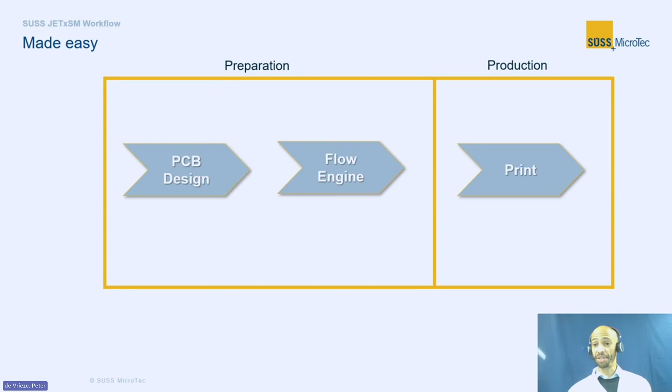First, I'll start with the first step, which is the PCB design, and which actions are needed to make sure you can actually print your board. So the first step would be to go and look at the CAD drawing that you have. When you have that CAD drawing, you need to do some design rule checks.

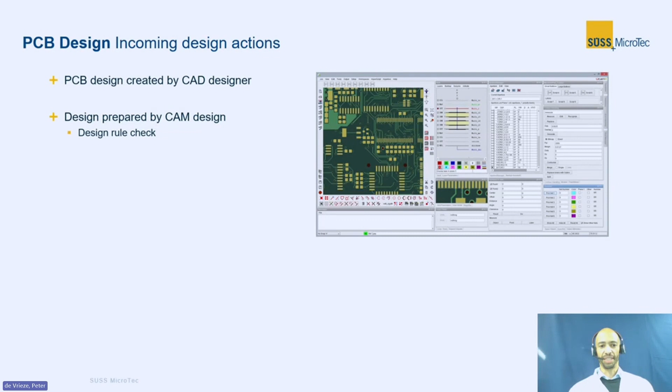These checks are, first of all, to make sure that you have the minimum clearance. And if you don't have that, you have to make sure you move your tracks, or partially move the tracks, so that you can actually print the solder mask on your boards.

In addition to that, you need to define the coordinate system. This is where you place the origin of your board in the left bottom corner of the PCB, and also keep your board in portrait mode. From there, you need to define and check the fiducials on your boards, because these will come in handy later on in the process.

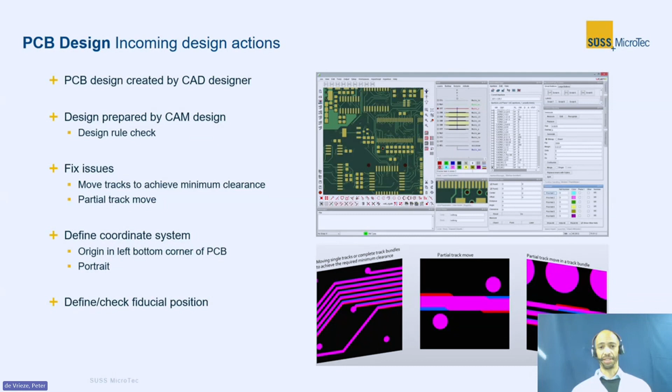Once you've done that, you can take your design into the flow engine. The flow engine is the next step of the process. It's a piece of software which we deliver along with the tool, and allows you to generate printing data out of your designs.

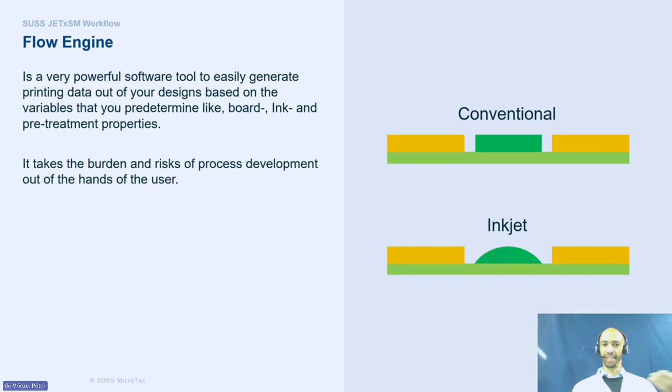It uses parameters which you have to add, like the board properties, the ink properties, the pretreatment, and together with those properties it creates a work package of data that allows your printer to deposit the right material at the right places on your board. In essence, what it does is take the process development that we've done and adds it into this software, so that as a user you do not need to develop this inkjet process for solder mask yourself. It's already in the tool, it's in the software.

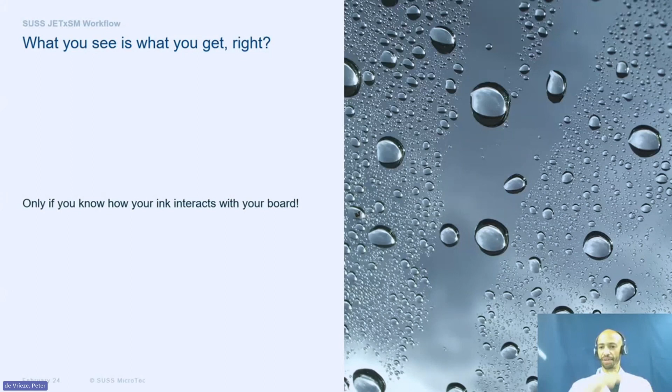That means what you see on your design is what you get on your board. And that only works if you know how the ink reacts with your board—how the material flows out, how it stacks on top of itself, and how you can create printing recipes. There are a few things that need to be combined, and this is all done with the flow engine.

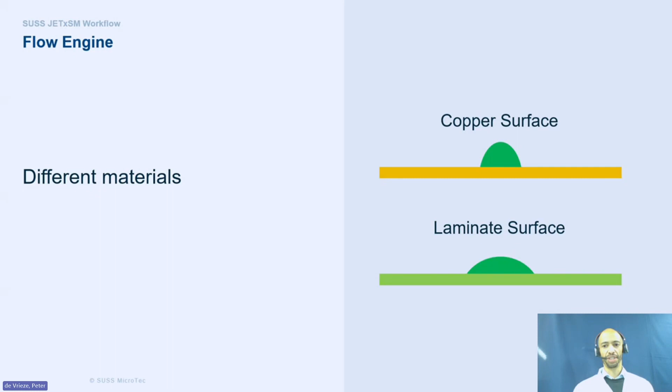So which parameters does it work with? First of all, the material. On which type of material are you printing—copper or laminate? Printing on one material or another influences how the material flows out, so it's important to know which material you're printing on.

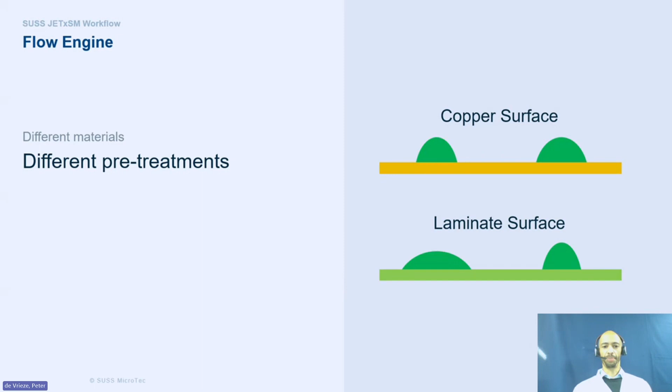Second is the pretreatment. There are different pretreatments out there, and each pretreatment has a certain reaction with the material that you print on top of your substrate or board. So it's important to also add in that factor.

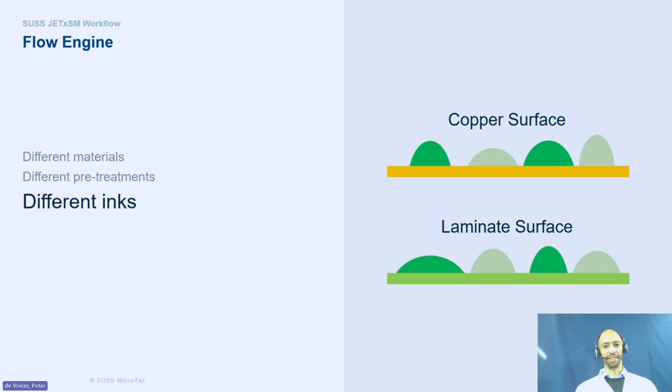The third is the ink. There are different ink manufacturers out there, and today we're lucky to have a few of those ink suppliers participating in this webinar. They'll tell you that their material has certain characteristics and its own way of printing.

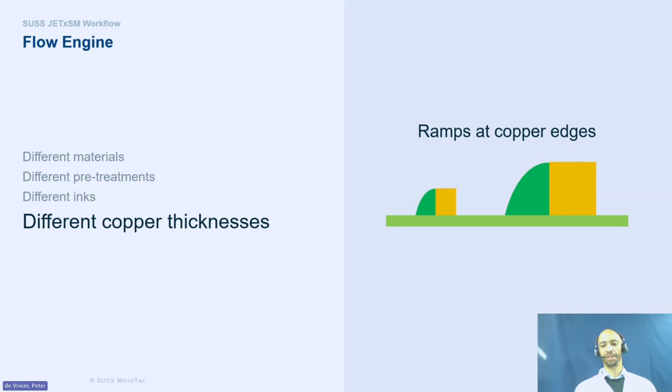Once you know all this, it's important to know the thickness of the copper on your boards, because that defines how many layers you need to print on top of each other to build your structures. If you look at the image, you'll see different sizes of copper, meaning that when you build ramps next to that copper, you need to make sure you build enough ramps.

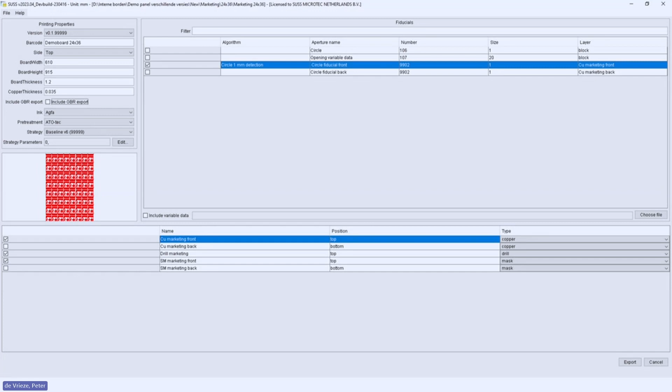Once you know all these things, you can take it into the flow engine. You'll see there's an overview where you can place certain information. Once you have your design, you can upload it into the flow engine, and this design can be in different formats—UCAMX, ODB++, DPF, or Gerber files. Once done, the flow engine gives you a small image of what you'll be working on.

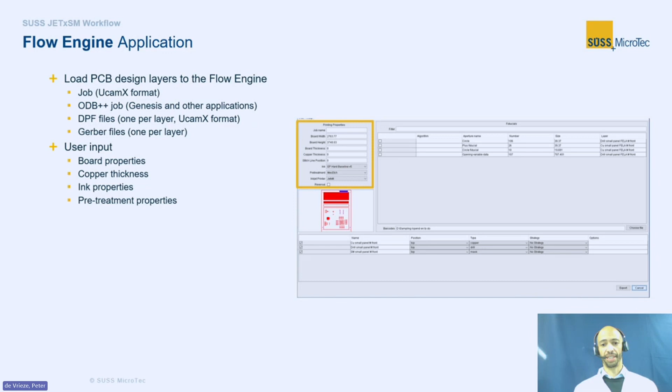You'll see there are a few parameters to fill in, like board properties, copper thickness, ink properties, and pretreatment—the factors I just mentioned. It will take those into account. So if you're using, for instance, an ATO-tec or a Mac Edge pretreatment, you fill that into the flow engine, and it will compensate for the outflow of the ink based on that pretreatment.

Once you've filled in these properties, you can select the fiducials you're using and tell the tool how it should detect them. Then finally you select your layers—which one is the copper, which is the solder mask, and which is the drill layer—so the software can take that into account as well.

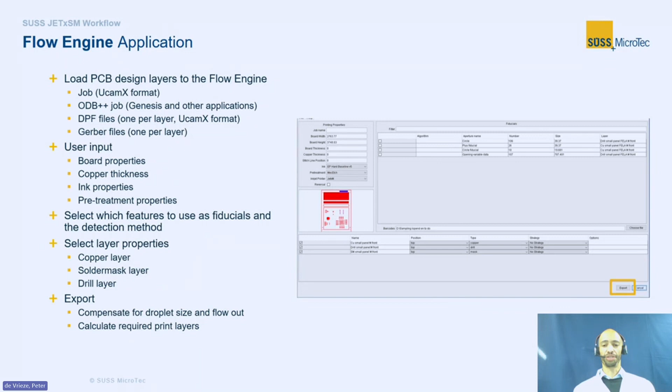Once you've done all this, you click the export button, and the software will create a work package for the printer. This work package creates data where we can compensate for the drop size and the flow-out of the material, and also calculate the amount of layers we need to print.

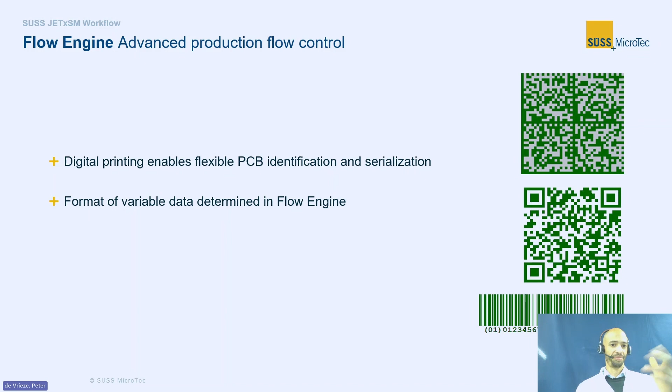Because inkjet is a digital technology, we have a lot of flexibility to add additional information to that work package, like identification or serialization. All of this can also be added through the flow engine, which helps with traceability of the parts later in the process.

Once we have this work package, we can export it and share it to either a network drive or directly to a printer where it can be retrieved. On the flow engine, you can work with one flow engine for multiple printers, meaning you can create these work packages and send them to different printers on your work floor.

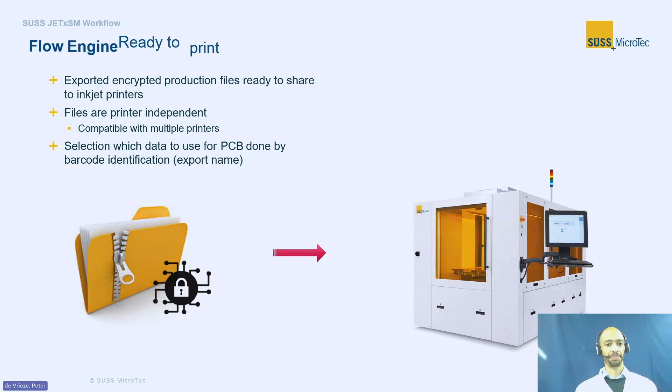Once you have those work packages stored, you can retrieve them on your printer using a barcode scanner or through the HMI on the printer itself. So we've prepared our work package, and once we have that, we can retrieve it and start a print. Today I will print on a JETxSM 18.

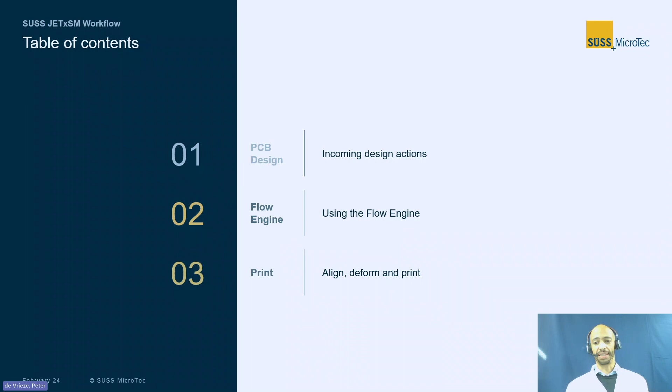And the JETxSM18 is actually the printer that is standing next to me. The JETxSM18 is a solder mask printer that can accommodate boards up to a width of 18 inch.

And it uses the Fujifilm Dimatix Samba printhead, which is a printhead that has over 2,000 nozzles, with each nozzle a droplet size of 2 picoliters. This particular machine has 6 of these printheads all in line, and has a UV bar before and after the array of printheads.

The reason we have the UV lights before and after is because when we are printing, we can instantly also cure the ink when it hits the substrate and pin it down so that we can adjust the flow out of the material. We have the light on both sides so that we can also print in 2 directions.

As mentioned, this tool has 6 printheads, and in order to print a board which is 18 inch, we need the amount of printheads that we have in this machine to cover half of the board size. That means we print in 2 different passes, so we have to cover half and half.

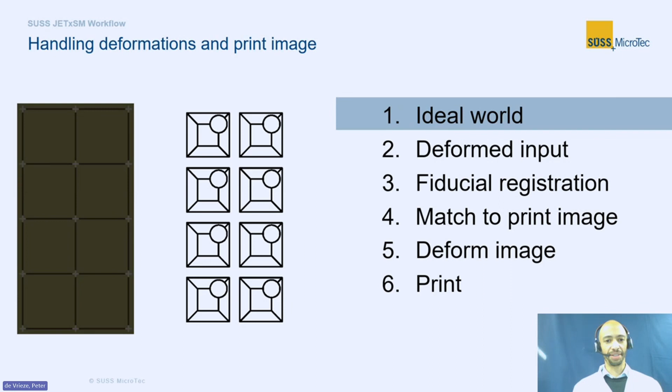Now, before we start the print, I would just slightly want to explain a little bit about the process of the print itself. First of all, before it will start printing, it will recognize the fiducials on the board. When it does that, we actually detect where the board is on our table, and if the board is aligned or maybe even deformed. So in an ideal world, you would have a board which is perfectly flat, perfectly straight, and you have your design that you want to print right on top of that.

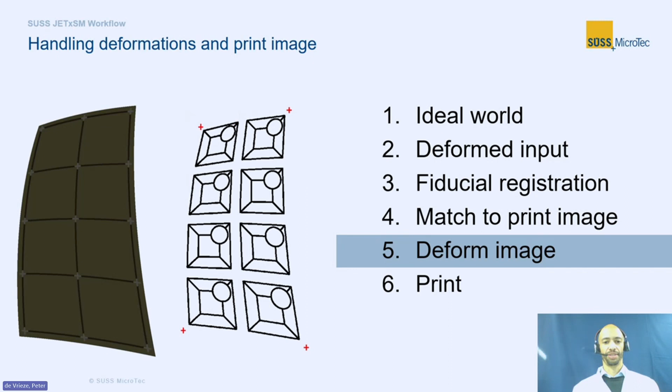However, if a board is not perfectly straight, and if it's slightly deformed, then you might have an issue when you start printing your design. So what we do before we start printing is an alignment, and we scan the fiducials on the board. And if we then detect that there is an offset, we will match the image that we want to print to what our board actually looks like. So prior to printing, we will deform that image, making it fit to the board, and then we do the print.

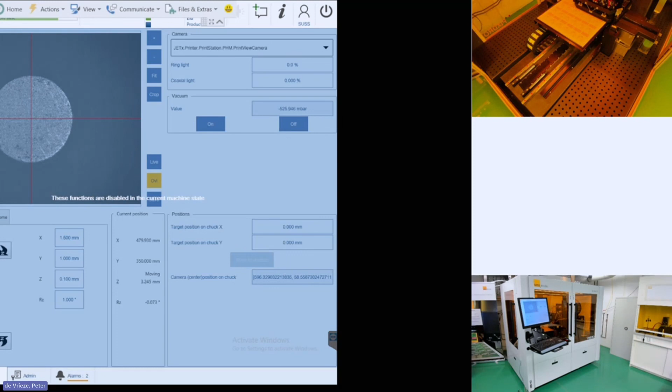So that's what we also will show today. So in order to start our print, you retrieve the tool, the part, you press start, and then from there it will start doing the alignment. So as you can see here on the screen, it's searching for the fiducials. It's scanning every corner, and once it's done that, it will calculate and see how the board has been deformed, how it is aligned, and after that, it will generate a new image that is fitting to the board, and then it will start to print.

So as you can see now, it's starting. You see the lights flashing. You will not see a lot, especially not on the first layers. We print in several layers. To the trained eye, you can already see that there have been some changes to the board. And what we do now, we start off by printing the dams and the ramps, finer features of the board.

And we do that in different steps. Depending on the thickness of the copper, depending on the pretreatment and the ink, the printer will determine how many ramps are needed. After you have printed the ramps, we will print the fill layers. So right now for this recipe, we will print 2 ramps and dams and 2 fill layers. So now it's printing the fill layers, as you can see.

And as you can see, this is a very, very fast process. So now you see all the ink has been deposited in the places where we want it to. And in this recipe, we've also added a UV bump. So we're adding an additional layer of UV to pin down those droplets. And there is a slight delay on that because we want to make sure that the ink flows out a bit so that we get a nice shiny finish.

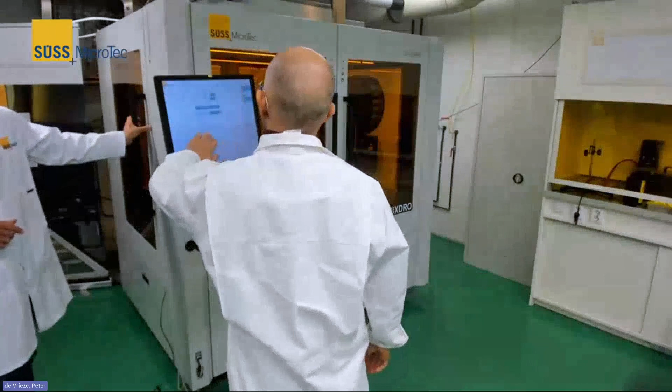So the finish of the board can be determined by changing the recipe, changing the parameters. So we see the board now is finished. So in order to retrieve the board, my colleague Monier switched off the vacuum, and I can take the board out of the printer.

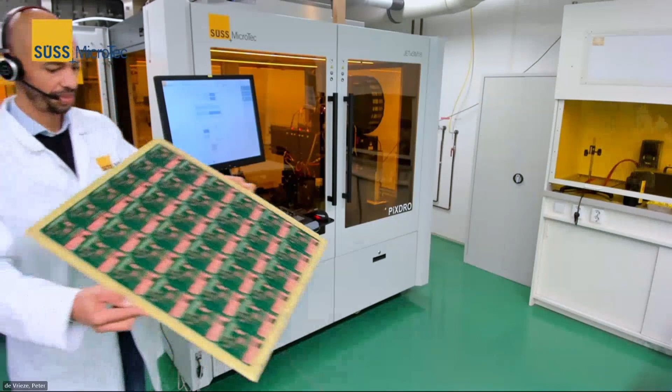So here you'll see we have our printed circuit board where we've added the solder mask onto the board. It looks very shiny. As you can see, we have deposited the material only where we needed it, and we've kept the areas that we want to keep free of solder mask exposed. That really keeps the process very short, and it requires a lot less steps than a conventional way of adding solder mask.

It looks very shiny. I can take this board out of the printer, and the ink is already cured. To give it a final cure, the next step would be to place it into an oven, but that would be a next step. So that is the printing of the solder mask with inkjet. I hope this was very informative for you guys.

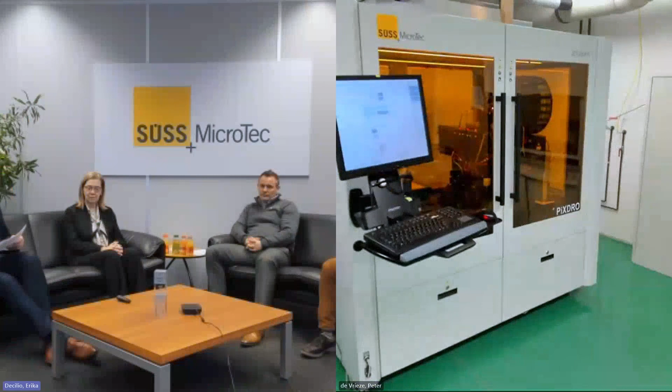Take it away. Really impressive, nice to see. It feels like I'm covering the World Cup of solder mask inkjet printing with all the cameras in a machine, in the laboratory, in a conference room.

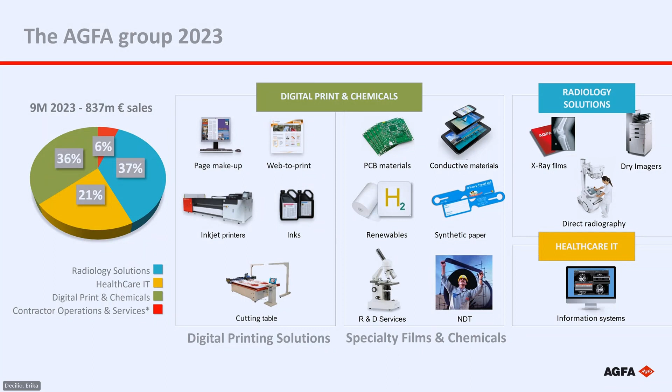Now I want to go more into inkjet printing. So we have more than 20 years expertise in inkjet, starting from our graphics division - inkjet equipment, inks, and everything for sign and display. From that experience, about 10 years ago, we decided to develop inkjet inks for the electronic print or PCB market, functional inks.

For the ink preparation, we have our labs where all the development work is done. We have a pilot plant and we have our industrial scale facility. We have a capacity of 2 million liters of inkjet ink per year.

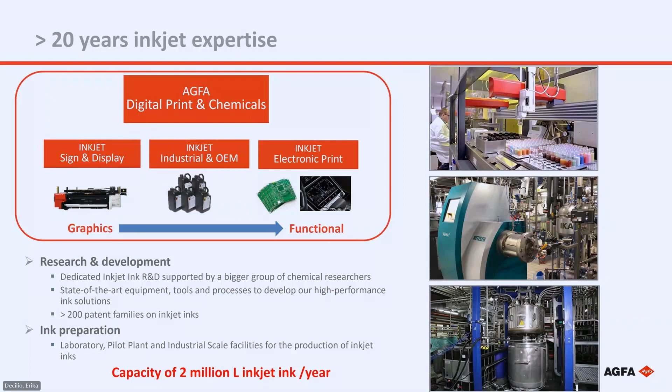Today we have the full range for PCB production. We have our Legend inks, the first products we had for PCB which really introduced inkjet into the PCB market. We have white, yellow and black Legend ink for rigid boards, and a flexible white Legend ink. Then we have our SMG02, our DiPaMat solder mask, which we'll talk more about in the next slides. And we also have our etch resist. We have our first generation etch resist ER01, but we have a new one in the last phase of development that will be commercial very soon.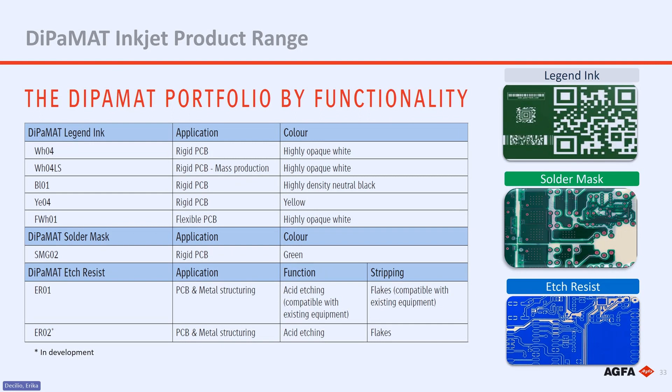Our inkjet solder mask, DiPaMAT SMG02, is commercially available since quite some time and already used by several producers in the market. It offers excellent edge definition. You can use it with a wide choice of print heads, due to the viscosity of the ink. It can work on Konica Minolta 1024i M and S heads, the Konica Minolta 1800i head, as well as the Fuji Samba head. It's quite a flexible ink, so it can be used for both rigid and flex applications, and it's validated by the printer integrators.

Of course it's compliant with the industry and environmental standards. We comply with the IPC SM840 standard. We are UL 94 V0. It also complies with the more stringent requirements from the automotive industry, certainly on thermal properties, the E2000. It complies with REACH, it doesn't contain any SVHCs, substances of high concern. It's RoHS and VOC compliant.

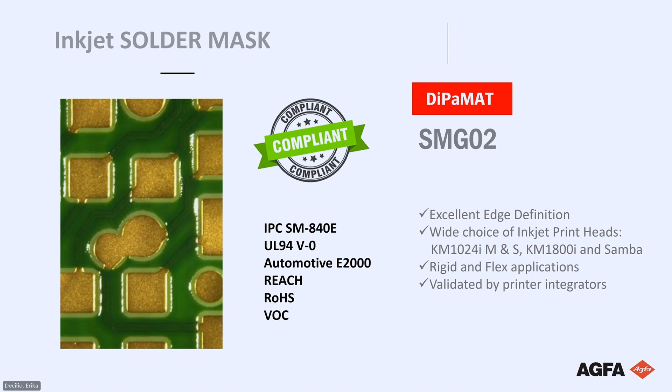The next slide gives a few details on the different standards we have to comply with. It's not everything, I listed the important ones, but everything is available and listed in our technical data sheet, which can be downloaded from our website.

To go through the important ones, it's UL V0. It complies with the solderability standard, resistance to lead-free solder, the two IPC standards in compliance with that. Hydrolytic stability and aging, thermal shock and storage, the -65 up to 125 degrees centigrade for 100 cycles, is the IPC standard, but we can do the more stringent standards from the automotive industry. You can also put it under thermal storage for 2000 hours at 150 degrees without giving any cracks or adhesion issues.

We tested all the surface finishes. It adheres very well, it doesn't give any cracks after tin immersion, ENIG, silver immersion, hot air leveling, OSP. It also complies with the outgassing law and with all the electrical tests. More details can be requested, we are happy to share this information with you.

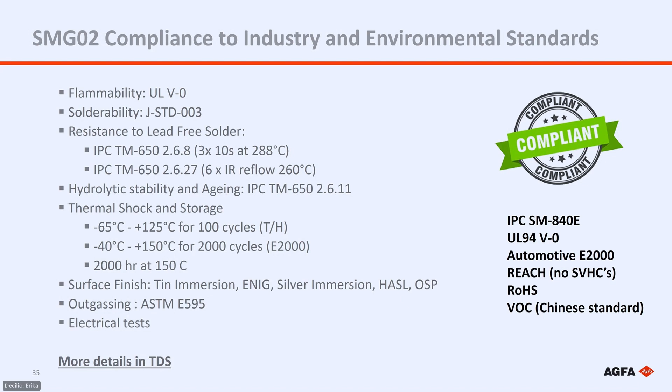Today I'd like to talk about the footprint of inkjet solder mask compared to traditional solder mask. As you can see from the flows, inkjet first and then conventional solder mask, inkjet is a lot shorter and has much fewer steps. Because of that, the physical footprint of inkjet solder mask is much smaller. You don't have the full coating, you don't have the pre-drying. In case you were still using film, you don't have the film plotting, no exposure, no developing.

But even more important is the environmental footprint. You have less materials, no film consumption, no film developer or fixer, no ink waste because it's a fully additive process, and it's more selective. It's also more sustainable because it's solvent free, so less VOCs, and also less nuisance for the operators. Much less steps, so much less power consumption, much less water consumption.

In many areas around the world, legislation is getting more strict for the use of chemicals, for chemical waste, for VOCs, for water consumption. So the expansion or building of a PCB plant is getting more and more difficult. Now with inkjet solder mask, it really gives you the possibility to grow your business without growing your footprint.

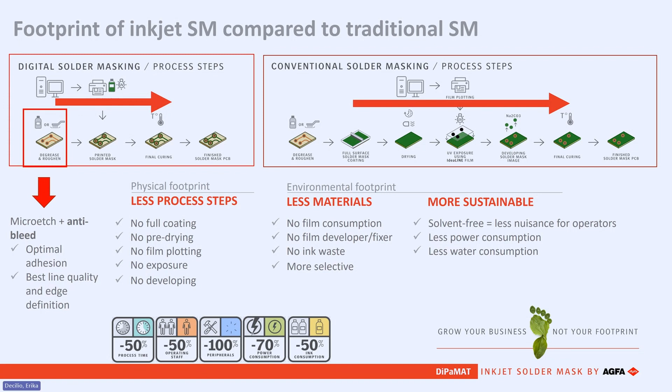Now, inkjet solder mask also has technology advantages. It's very revolutionary, it's fully additive, and you have full flexibility. As Peter already explained, you can print a QR code for serialization and traceability. It's all possible with inkjet.

It's 3D printing, so it allows you to deposit variable thickness and coverage on a board. If you need resistance against electrical voltage breakdown in a certain area, you can put a thicker layer there. If an area doesn't need solder mask, for instance for high frequency 5G applications, you simply don't put any solder mask there. In preparation for the assembly phase, you can build 3D structures, like walls for underfill. It's all possible with inkjet solder mask.

In the case of boards with high copper, with traditional solder mask you sometimes need multiple passes through the full solder mask process, 2 or even 3 times, to get good enough coverage of the shoulder of the copper track. With inkjet solder mask, it goes in one pass. You build the dams to a certain height, basically the height of the copper, in multiple passes. As you can see on the picture, shown in blue, you see the different layers clearly. So it's much faster and more efficient.

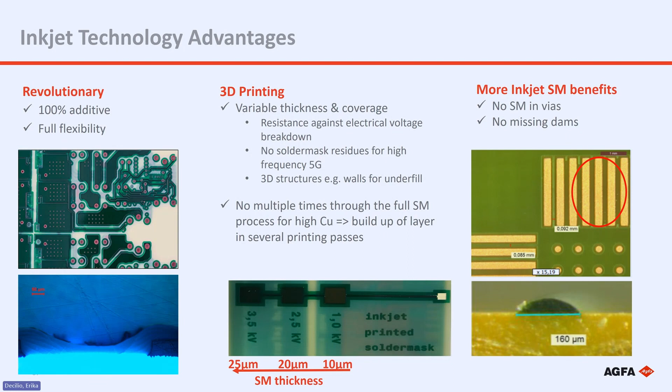So as a conclusion and summary, the breakthrough of inkjet is really happening. We see new greenfield PCB plants choosing inkjet solder mask. There are already more than 35 installations up and running worldwide, and OEMs have high interest and have started validations. Agfa can be your partner for this emerging new technology.

We have a worldwide presence, with offices in the US, in Europe, and in most countries in Asia. We have a very strong network in PCB because we've been active in the PCB industry for more than 50 years with our traditional Idealine PCB film. We have deep know-how in inkjet, also from our experience in the graphics field, and we are fully equipped to support the transformation to digital production.

We have the full PCB process in our labs. We can pre-treat boards, we can finish boards with immersion tin, and we can print, we have inkjet printers. So we can fully support you with the benchmark and evaluation, of course in collaboration with our partners, but we have everything also in our labs.

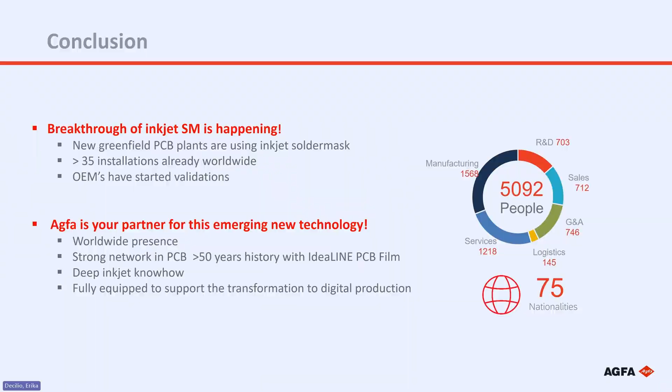Most impressive to see that all the assumptions from over the years have been converted into facts of the advantages that inkjet can deliver, facts that have been proven and tested. As we know, also your close cooperation with SUSS in developing the inks, the machines, and effectively the process. So yeah, it's specialism at its best.

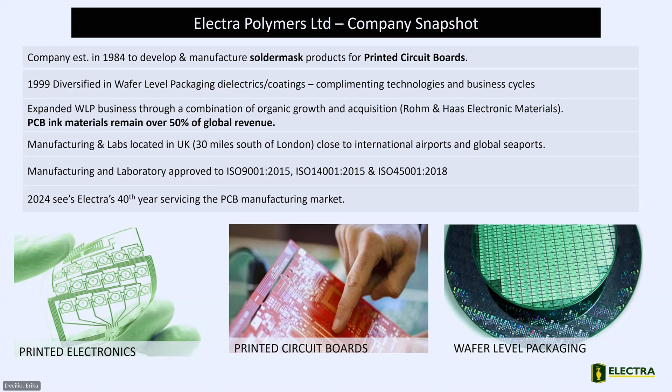Electra is already established as a technology leader in traditional solder mask, but we are also emerging as a technology leader in inkjet solder mask. We have a wealth of experience. As I've already said, we've been in service to the PCB industry for 40 years, so we have all the experience from the traditional solder mask and all the know-how of the processes before and after.

We commercialized our first inkjet solder mask more than 5 years ago, and we have been researching inkjet solder mask for more than 10 years. We've worked very closely with all pre-clean manufacturers and integrators, and also printhead manufacturers, so we are currently approved on and with the major printhead and tool manufacturers.

We have a lot of customers currently using inkjet solder mask, some of which have already made the switch to 100% inkjet solder mask, so removing their traditional process.

The technology, as we see it, inkjet, works well with our current roadmap, being digital, it's additive, and it's sustainable. But importantly, it's been earmarked for a lot of growth. We've managed to work with potential customers on volume installations in America and Asia, and I think I'm fairly safe in saying that by the end of 2024, Electra will be the largest supplier of inkjet solder mask globally.

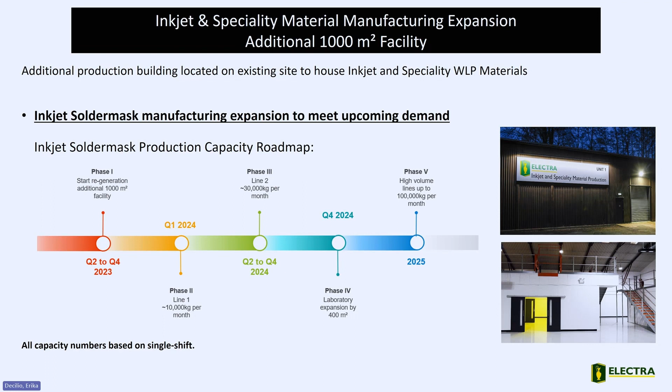So coming on to the main part of the presentation, to identify some of the internal challenges of PCB manufacturers as we see them, mostly within the solder mask sphere, but some of these can relate to other aspects also.

One big factor we've seen post-COVID is personnel. Finding new people, and more importantly, keeping new people, is becoming more problematic. There's a number of areas we see with this: some are generational, some relate to the work environment, the specialist skill set around solder mask application, and the sheer number of staffing needed for the department.

Inkjet has an important role to help negate some of these issues. Inkjet is a digital process, front-end driven, so it's more appealing to the younger generation who have grown up with technology, more used to screen-facing systems, not so much the hands-on manufacturing side.

From the environment aspect, the solder mask department can be a bit smelly, handling chemicals, solvents, masks - a different type of environment than some people are used to who haven't been in manufacturing. As we've seen from Peter's presentation, Inkjet is a clean environment. It's boxed in, with extraction and filtering, so limited smell, limited exposure to chemistry. It's a hands-off clean process that will make it more appealing to potential staff.

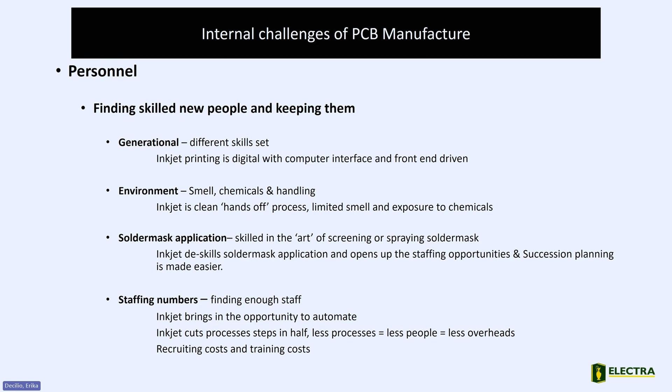Also something that is seen as a risk is defects, causing scrap and remakes, which all cost money. You have FOD - foreign object and damage - ink in holes, ink on pads, ink where you generally don't require it or want it, missing dams, missing features, or expanded dams and features.

So how does Inkjet help with this? Well, Inkjet is within an enclosed, filtered coating environment. It's pin-cured before it leaves that environment, so it's not wet or sticky. So when it comes out into the solder mask department environment, which may be unfiltered or not exactly a clean room, you won't get foreign objects sticking or placing on the solder resist. It also doesn't have to go into a tack dry oven circulating air, which with wet or sticky ink could cause an issue.

As covered previously, it's an additive digital process, so the ink is only applied where it's required. If the data is correct, the mask will be deposited where you need it - not in a hole, not on a pad.

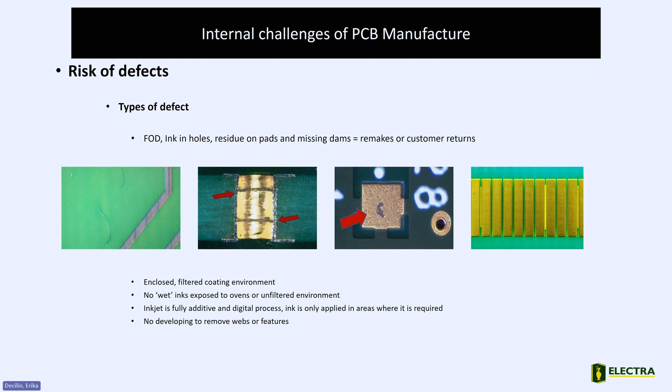Environment regulation - as we all know, these restraints are becoming tighter and tighter. As Mariano correctly pointed out, this is very important moving forward. Restrictions on water, even just in some countries on getting water in and taking water out. VOCs are becoming a bigger issue. Energy constraints, cost of energy, or even availability of energy - these are all relevant to PCB manufacturers today.

Regulation - new regulations seem to come out every day, every month, every year, changing on a regular basis. I can say that EMJ 110, Electra's Inkjet solder mask, has zero SVHCs and complies with other related regulations. I'm not saying the Inkjet solder mask won't be covered by new regulations or changes in regulations - it will be tied to that also. But the way we formulate our products means we can formulate out some of the substances which are SVHCs.

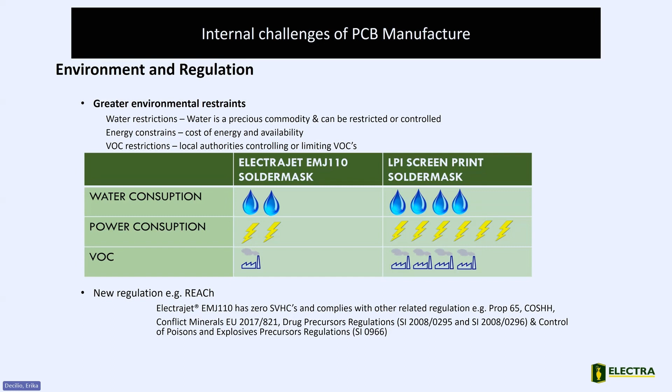So hopefully now I've sold you on Inkjet itself and the process and all the positives. How does that translate? How do you move that on to your customer, the OEM, the CEM, the final user? So here are some unique selling points and potentially some upsells that you would be able to use once you adopt the technology.

Meeting industry requirements - not necessarily an upsell or unique selling point, but meeting all of those requirements such as IPC SM840, thermal shock, storage - should be a reassurance to your customer, the end user, that the product is fit for purpose.

I've covered also that it's an additive process, so reducing defects such as ink on pads, ink in holes, missing features is now also not necessarily an issue with Inkjet.

And repeatability is an automated front-end driven process, therefore there's limited human interaction and human factor, which means you should be able to control the process better, with reduced process steps. You won't have humans interfering with the process, changing parameters or leaving things in processes for too long. Again, not necessarily something you want to communicate to your final user, but the fact that you have less process, more repeatability, less chances of error should be a selling point.

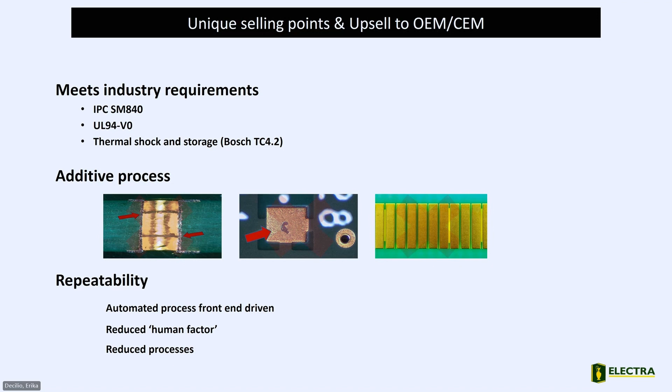Flexibility - I don't necessarily mean flexibility of the mask, but flexibility of the process. This is where Inkjet really excels with its unique selling points. You can jet more mask in one area, less mask in another area, put mask on a copper track where it's needed for reliability testing, or not put any ink, or a limited amount of ink, on the laminate. Or you can build 3D structures - walls, dams, barriers - to help with underfill or solder paste placement. These really are unique to Inkjet, and your competitors who don't have Inkjet will not be able to offer this to the OEM or the final user.

Sustainability is clear. All organizations, big, small, medium-sized companies, all need to show that they are on the sustainability path and show their green credentials. Inkjet is certainly a way that you can improve on these things.

Industry 4.0 is something that is very important. You have the possibility of automation, you have more data because it's data-driven, connectivity, traceability, which is very important. Also, you're going to have analytics and AI. All of these things can be used to continuously improve your process and can be sold to your customer as a real advantage of the process.

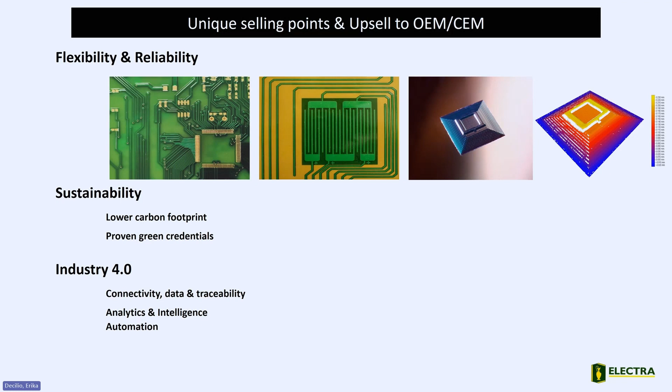So in summary, Inkjet, I think, as we've all said, is now here. It's arrived. It's not coming - it's here. 2023 was a big year for Inkjet solder mask, there were a number of placements. 2024, I think, will be an even bigger year. There are multiple placements of tools this year, from small volume, medium volume, large volume. So it will be proven across the spectrum.

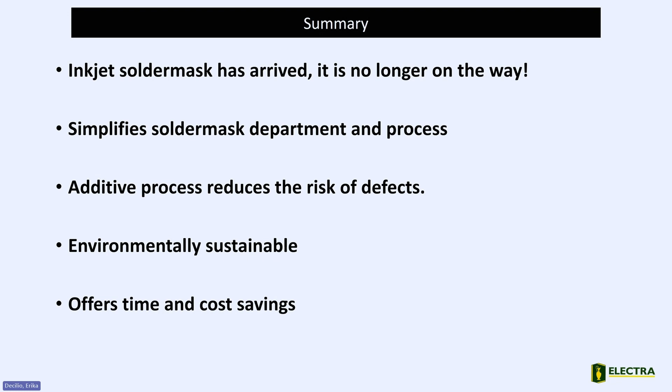Inkjet solder mask simply simplifies the process. It's a simpler process - maybe not simple, as I'm sure Luca would agree - but it helps simplify the process in regards to fewer process steps and it not being such a skill in regards to screening or spraying. It's additive, as I've explained a number of times. The risks of defects and all the things attributed to that will be a real benefit, not just to the PCB manufacturer, but also the end user. Environmental sustainability, that's obvious - Inkjet solder mask is greener. And a big part of everything in life these days is time, and we all know time is money. So cost savings are prevalent across Inkjet and the Inkjet technology.

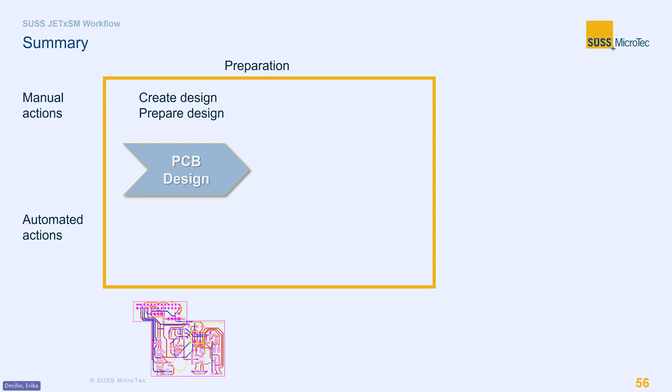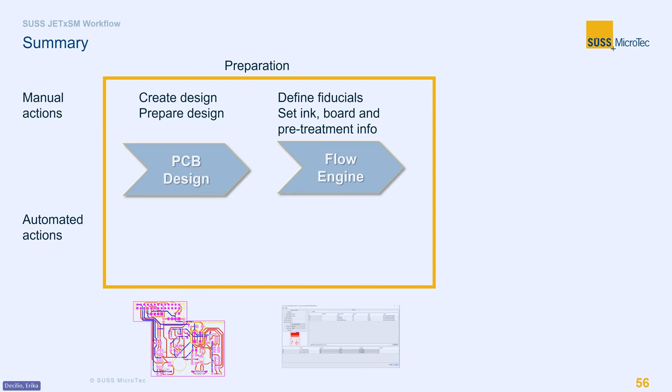Within the offer of SUSS, we provide a flow engine, software that helps you define fiducials, set the ink, the board details, and the pre-treatment set for your manufacturing. All of this information goes into the flow engine, as Peter explained, and the heavy work is done by the algorithm and the database information inside the software. So what we're talking about is an automated compensation of droplet size and flow out, and the creation of different layers and the stacking of these layers in order to achieve fine features, as well as get to the right solder mask thickness for the copper intended.

Once this is all put together in a work package, it is made available to the production site, linked with a name. As Peter showed, this can be the operator typing it in, or a barcode reader retrieving it from a batch protocol or from the board itself. This will allow the print, which is as simple as loading the product and pressing start.

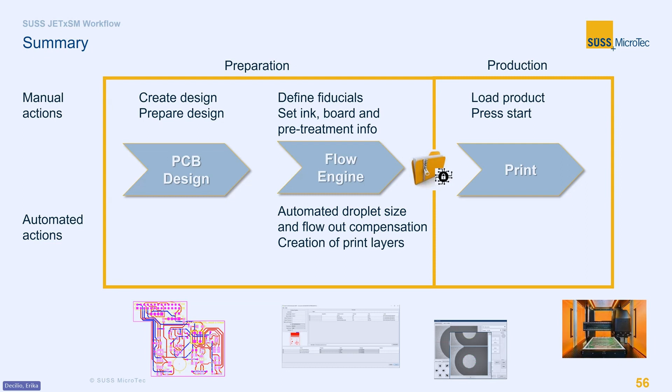What happens inside is product recognition, fiducial registration for deformation, as it was well explained by Peter with the sketch. That will then go to rasterization, which makes full use of the high resolution of the SUSS equipment, and then result in the print. So it is as simple as 1, 2, 3, as we see there.

SUSS made the effort to automate as much as possible the specialty of inkjet and to digitalize it, so that it's easy to follow, to enable data, to use serialization on the board, and therefore to enable improvements on the go.

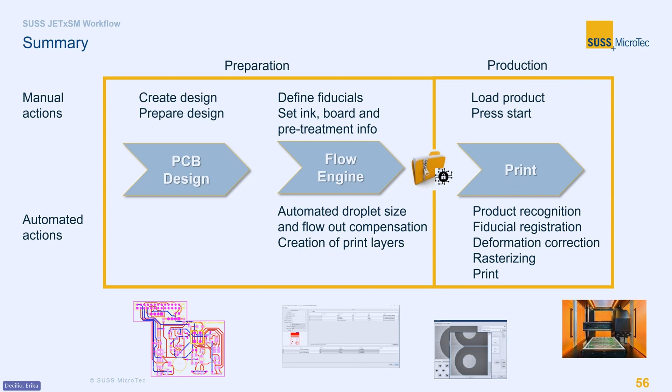Question from Mariana: what do you see as further challenges in the development of inkjet solder masks compared to conventional inks? Conventional inks are generally very different from inkjet inks. They are most of the time two-component inks, so they start to react when you bring the components together. In the case of inkjet, it's one component, so it's quite difficult to develop a stable ink with a shelf life long enough, because everything is in one component. In addition, inkjet inks are jetted through the print heads with nozzles producing very fine droplets, so inkjet inks are composed of nanoparticles, which also limits the formulation. For instance, with traditional inks you use certain components like fillers to reach certain properties—that's not possible with inkjet inks. The pigment dispersion has to be in nanoparticle size, so that also requires very special know-how, and the right dispergators to keep it stable in the ink. Also here, it's a much narrower window to develop the right pigment dispersion. It's a very low viscosity ink compared to traditional inks, so there too you are more limited in the formulation. Inkjet inks are, in the end, very different from traditional inks.